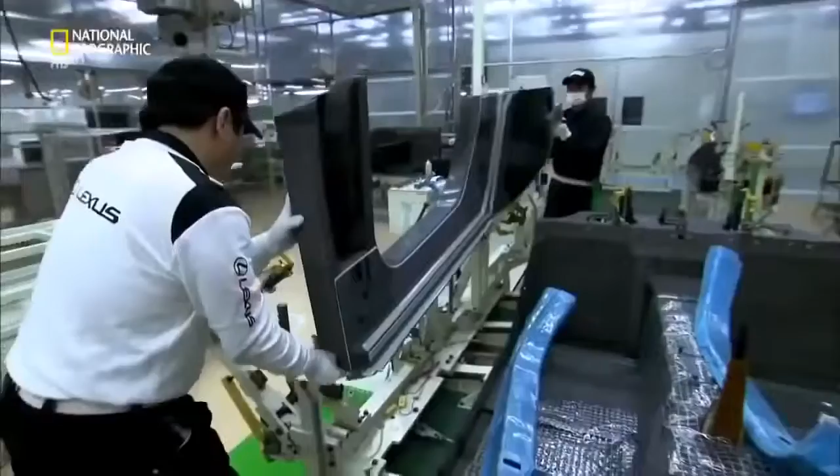Inside this top-secret megafactory, a car like no other is taking shape. Craftsmen hand-build what they consider an automotive work of art. Money is no object. This machine must redefine a billion-dollar brand. Failure is not an option.

Japanese marque Lexus sells itself on luxury, marketing its cars as elegant, quiet, high-tech, and efficient. Now, a different kind of car wears the Lexus badge, the LFA. Aggressive, loud, agile, with the highest-revving V10 engine in a production car, reaching 325 kilometers per hour. A car like nothing Lexus has ever produced before.

Lexus is just over 20 years old. The world's largest car maker, Toyota, created the brand to compete with other high-flying luxury marques: Mercedes-Benz, BMW, and Jaguar. It's worked — Lexus is now one of the biggest-selling high-end marques in the United States.

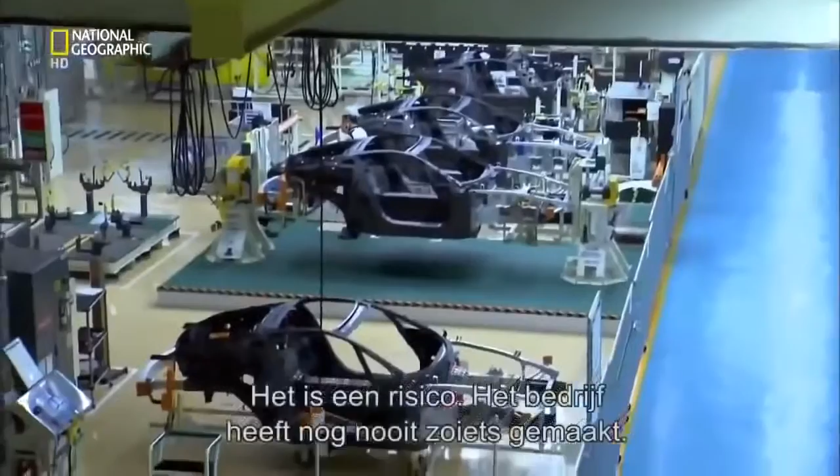It's a risk. The company haven't made anything like this before, and their reputation depends on its success. Chief Engineer Tanahashi is stepping into the unknown. He must build a car, a team, and a factory from scratch. Basically, we proceeded at my discretion, and where there weren't any rails, I laid them down.

Finding a factory in Japan isn't hard when you're part of the country's largest company. Toyota is so big they even have their own city, Toyota City. Of the company's 15 Japanese factories, 10 are found in the city or close by — among them, the Motomachi assembly plant.

The company transformed two unassuming blocks of this megafactory to create the LFA. They then scoured Toyota's 50,000-strong Japanese workforce to handpick just 175.

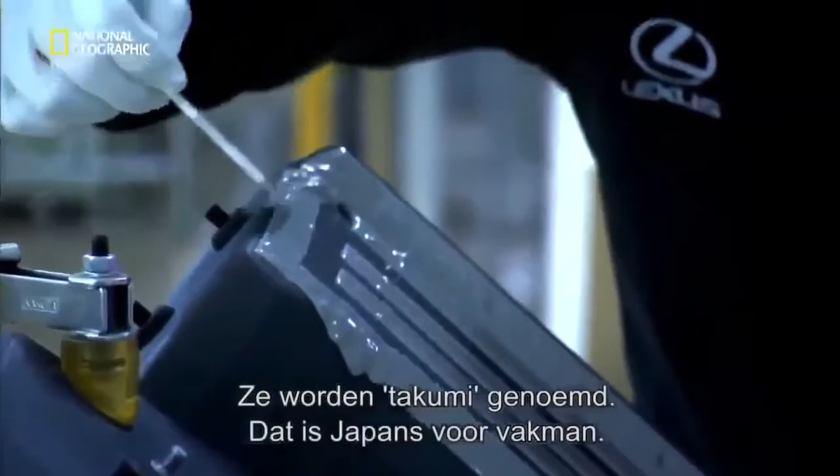All the associates here at the LFA Works feel they are artisans, not just operators. These artisans are known as takumi, Japanese for craftsmen — a status only conferred on the most highly trained, skilled workers. Each and every associate at the LFA Works is seeking to achieve perfection, taking this challenge on with a sort of samurai spirit.

Yamanaka Shigeru is manager of the LFA Works. His teamwork credentials come from another time-honored Japanese tradition: baseball. Before this, I was working as manager of the Toyota Motor Corporation baseball team, which brought people together from lots of different backgrounds. It was because I could manage that organization that I've been made manager here.

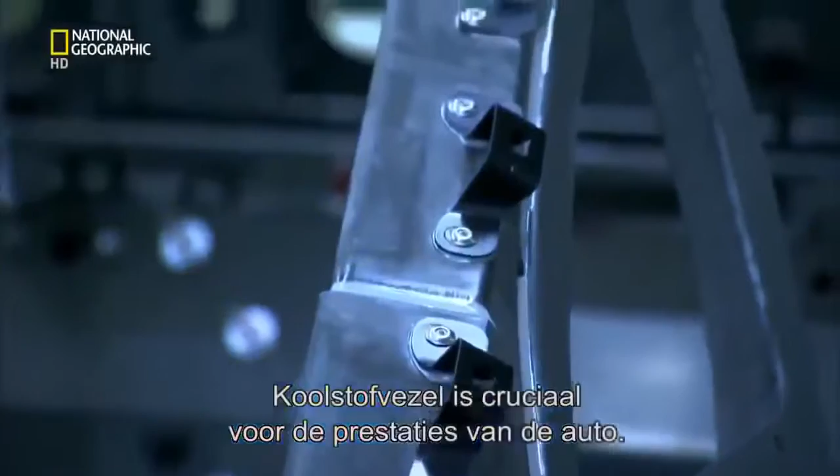To reach their goal, the tight-knit team utilizes sophisticated tools and materials to build the car. The most important of these is carbon fiber composite. Carbon is crucial to the car's performance — a material five times the strength of steel, yet a quarter the weight. It's the construction material of choice for both Formula One racing cars and the aerospace industry. The company even make their own carbon fiber here on site.

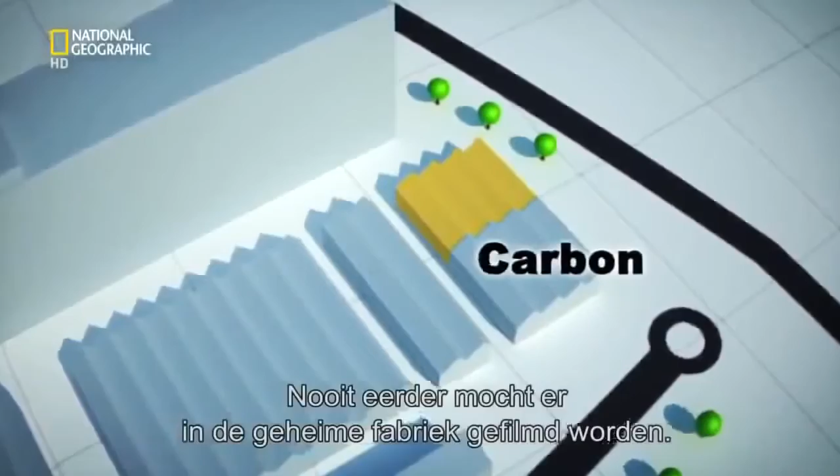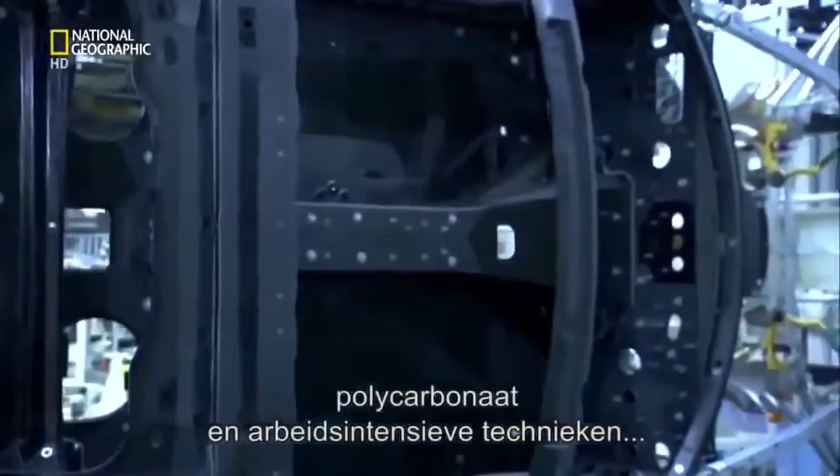Up until now, no television cameras have ever been allowed inside this top-secret facility. First, simple strands of carbon fiber are woven into a pliable cloth using an automated weaving machine. This fabric is then transformed through heat, pressure, polycarbonate resin, and labor-intensive techniques into the car's core, known as the tub.

The tub is pieced together like a 3D jigsaw. It starts with the construction of the floor. To make it, precisely cut carbon fiber cloth is lifted onto a mold. Next, skilled takumi smooth the supple fabric over the mold — this one is for the transmission tunnel that will house the drive shaft and exhaust.

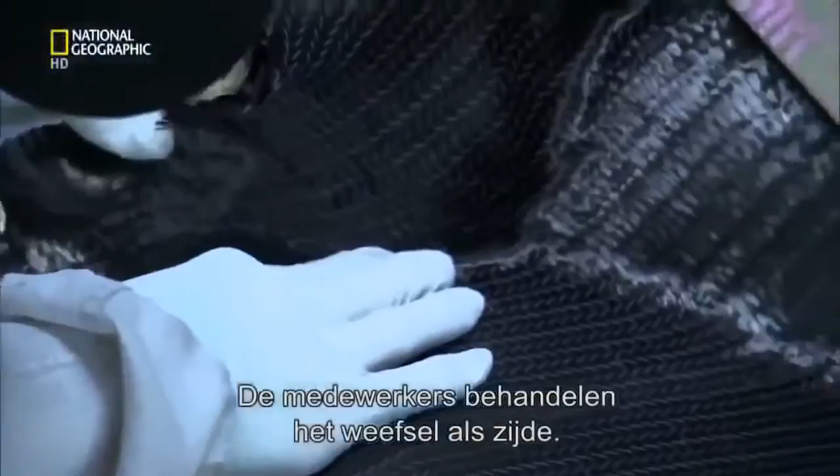In very complex areas like this, the fabric inevitably becomes frayed and not very neat. The associates work with these areas as if working with silk, taking great care every day. They also wear masks to avoid breathing in the hazardous fibers.

In the beginning, the associates found it very difficult to work this material. It was much easier when they used an iron.

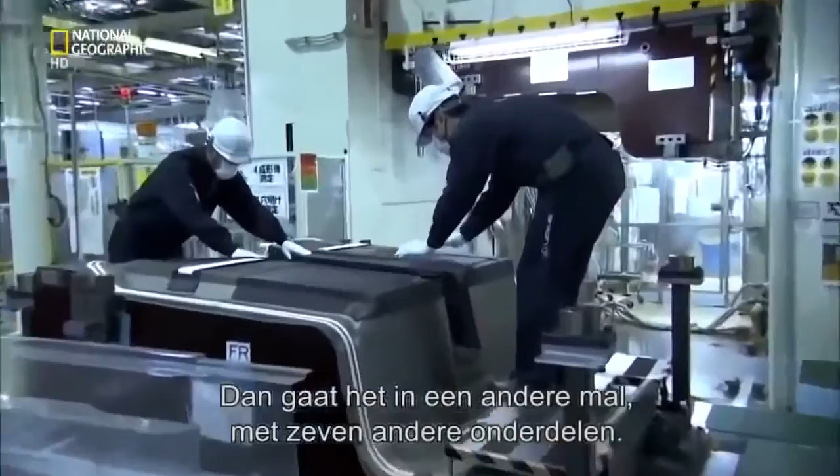The completed part is grill-heated to set its shape. It's then fitted into a template, along with seven other floor parts, and inserted into a 1,000-ton press. A glue-like resin is pumped into the template, and the whole section is then baked for 8 hours at 130 degrees Celsius. Under this pressure and heat, the resin sets hard, binding the individual parts together to produce the car's floor panel.

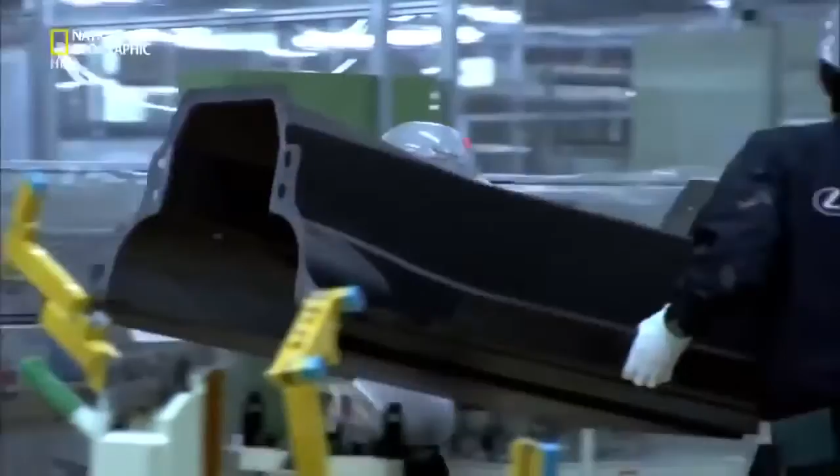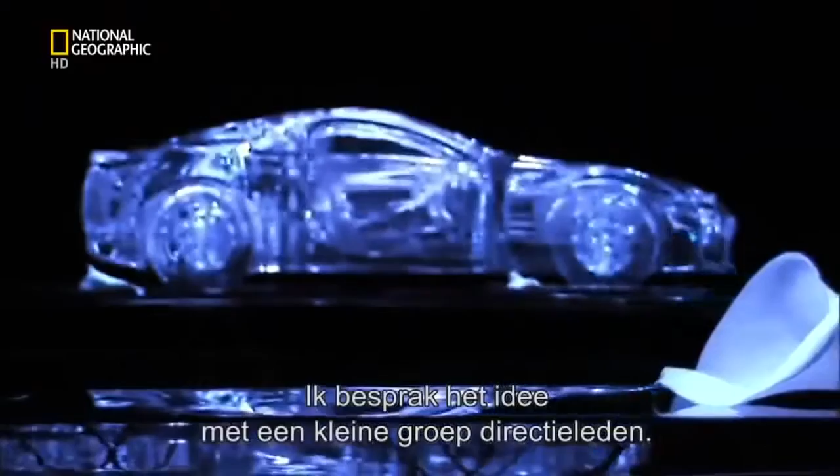Back in 2000, the concept of a world-beating supercar only existed in one man's head. At the company, I talked to just a small group of people at the top, not expecting anything, and they said, go ahead and try.

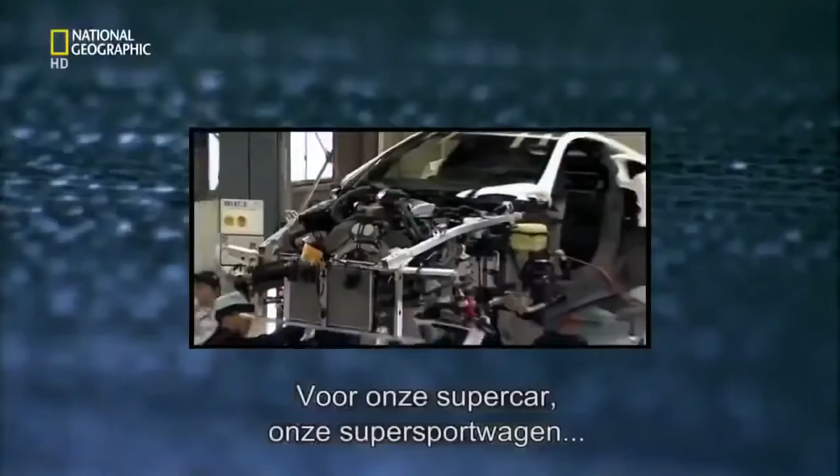With permission to proceed, Tanahashi gathers a team of engineers around him, and they start to make the basic engineering decisions. In the beginning, we planned to make the body from aluminium. But Tanahashi is fascinated with the possibilities offered by carbon. Developing a supercar, a super sports car, carbon fiber was a material I really wanted to try using, if at all possible.

But this wonder material has its drawbacks — it's expensive, and the company has never used it to build any of their cars before. Despite these significant challenges, Tanahashi gets his way.

In 2005, my boss said, why not go for carbon? Slapping me on the shoulder. And I made the decision to go for carbon then.

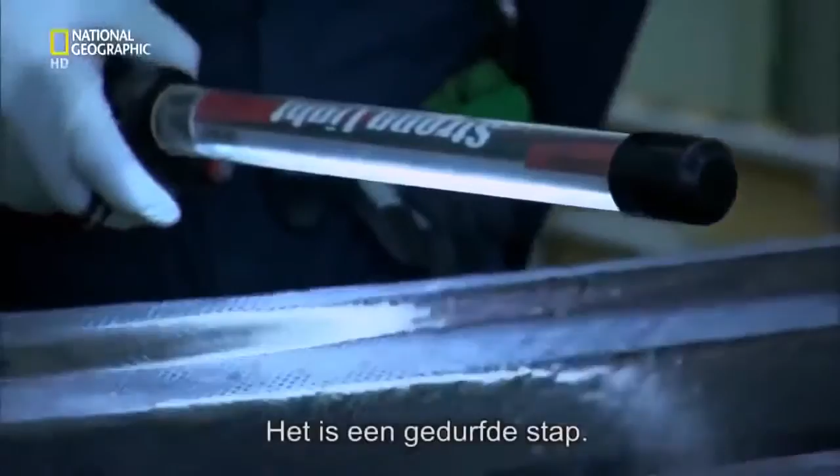It's a bold step. Everyone involved with this project must master a material they have no experience with at all. It was the first time the workers had touched carbon, and everything about it was difficult for them.

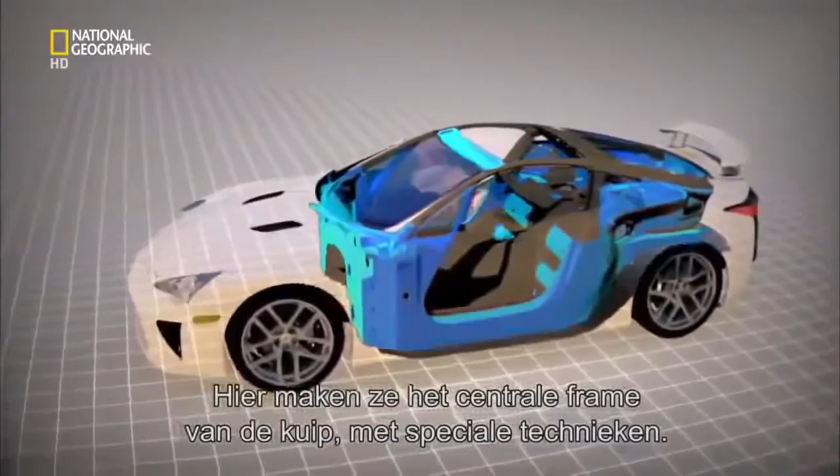In the state-of-the-art carbon fiber facility, the Takumi are returning from lunch. They vacuum themselves down to remove any foreign particles before entering a highly confidential sealed room. Here, the majority of the tub's central frame is created using the most intricate techniques.

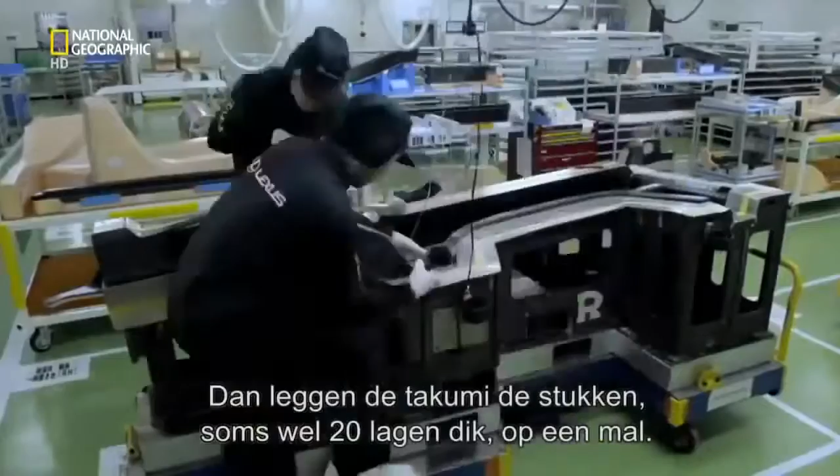An automated laser cuts out hundreds of individual shapes from carbon fiber cloth pre-impregnated with a sticky resin. Next, Takumi layer the cutouts, up to 20 sheets deep, onto a mold. This one will make the right side panel. The associate uses a dryer to raise the temperature of the laminate, half-melting the resin as he applies it. The tacky cutouts stick to each other, and any gaps are squeezed out using a vacuum bag that forces them together.

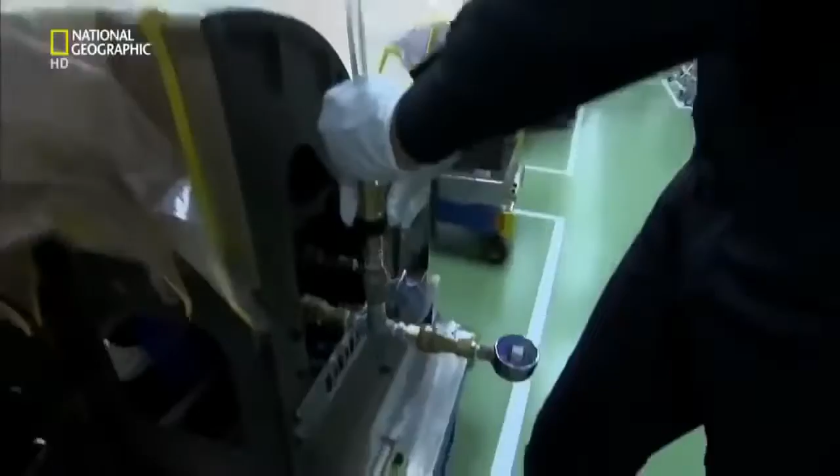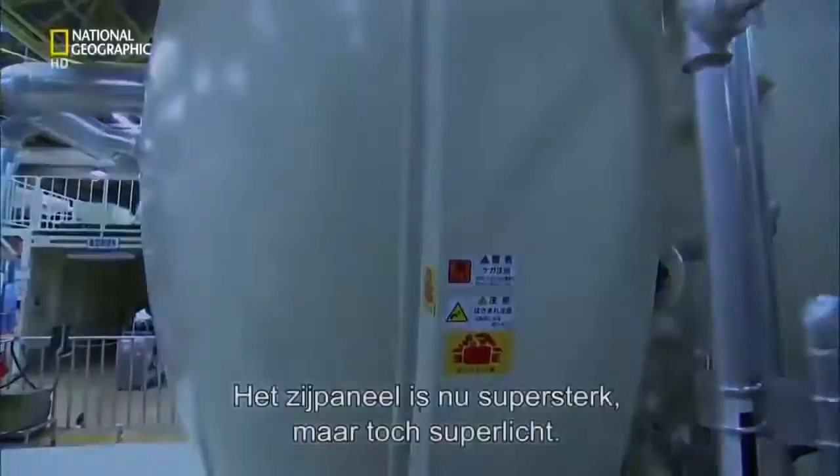The shrink-wrapped side panel is then wheeled across the works and loaded into a pressurized oven. Baking overnight at 150 degrees Celsius sets the resin, resulting in a side panel that's both ultra-strong and ultra-light. An aluminium equivalent would be twice as heavy.

Weight saving is the holy grail for all auto engineers. Less weight and more power leads to increased acceleration, and speed defines a supercar. The body of the LFA is 65% carbon fiber, helping it accelerate from 0 to 100 kilometers per hour in 3.7 seconds. If made of aluminium, it would be 100 kilograms heavier, like having a sumo wrestler in the passenger seat. As it is, this car weighs just 1,400 kilograms all in.

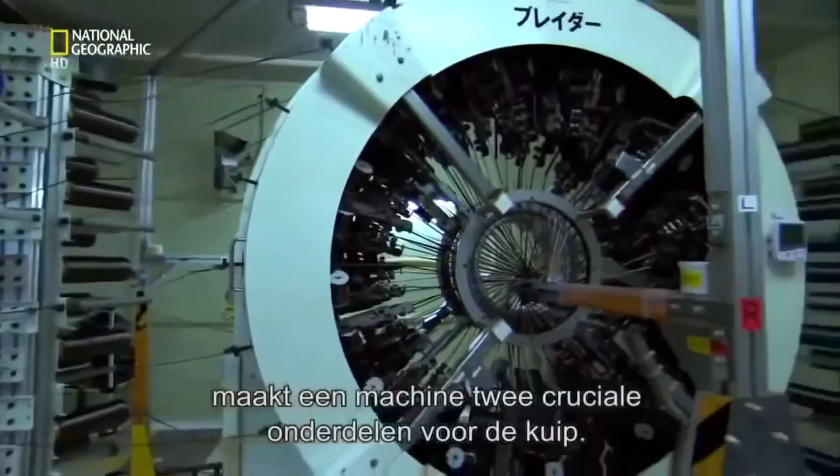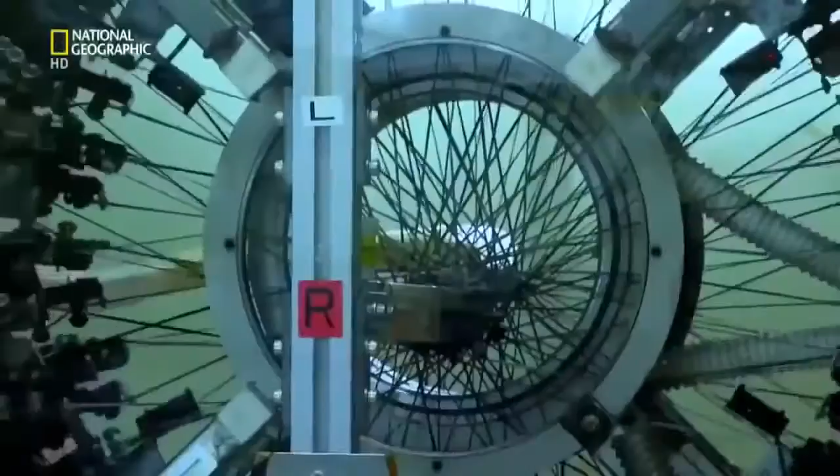Back at the factory, in a locked room, a bespoke machine creates two crucial parts to complete the tub's construction. The roof rails support the windscreen, as well as protecting the driver if the car rolls over. This custom-built circular loom weaves the carbon rail in 3D. It uses lasers to control the feed of carbon fiber strands onto 144 bobbins. These knit the carbon around a top-secret automated template fed through the center of the loom. This is done twice over to cross-thatch the carbon weave, giving the rail its strength.

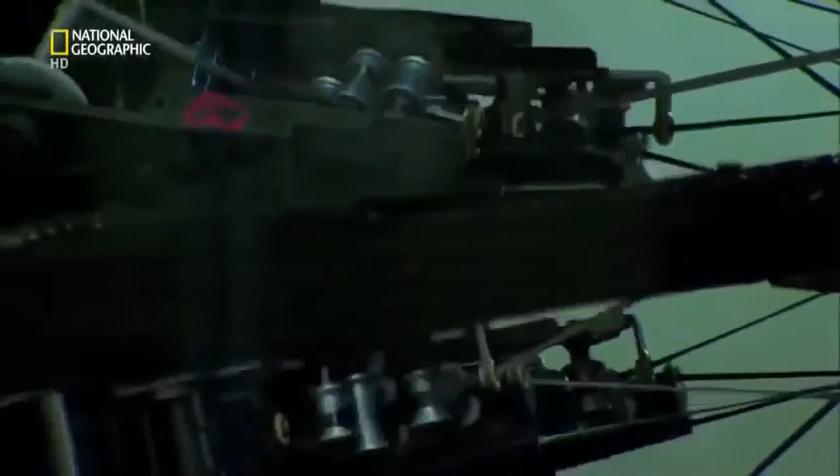The whole mechanism has its own control box, and for good reason. If something goes wrong, even a little thing, the shape gets distorted immediately, so the operator constantly pays attention to avoid this.

The roof rail is heated and impregnated with more resin to complete its metamorphosis from a flexible tube to a rock-hard rail. You may think this is quite heavy, but it is only 2 kilograms.

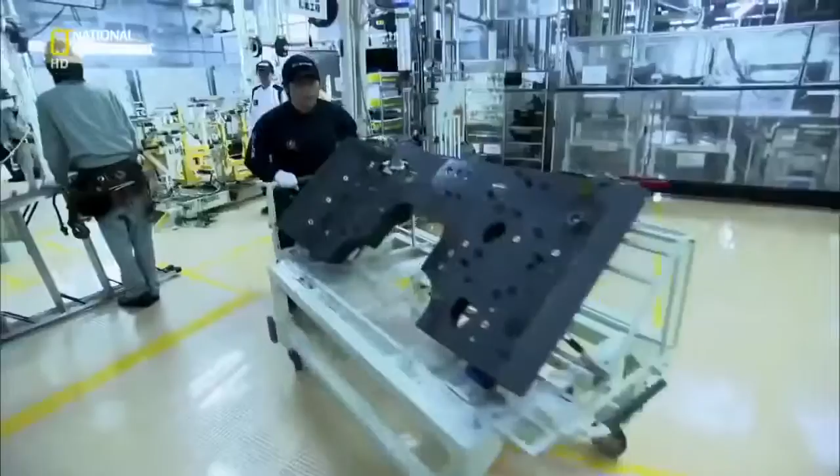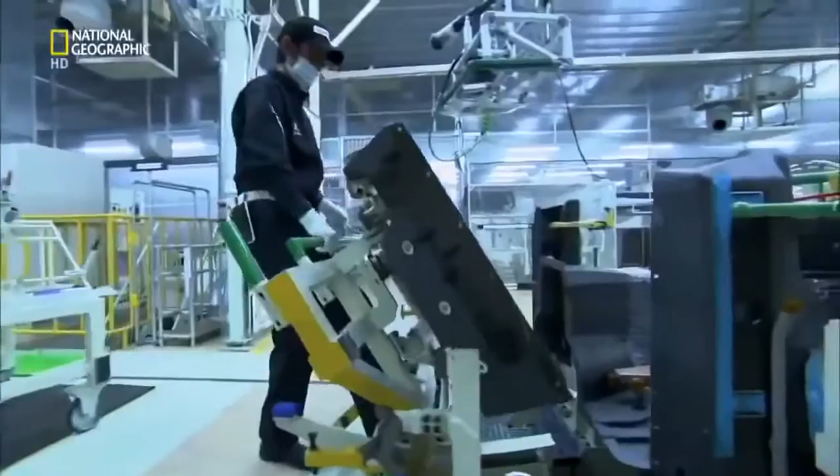The tub is bonded in another top-secret jig. First, a super-strong adhesive known as epoxy resin is applied by robot and hand to each of the parts. The separate parts are transferred to the jig and locked in place. Pop rivets keep the pieces aligned.

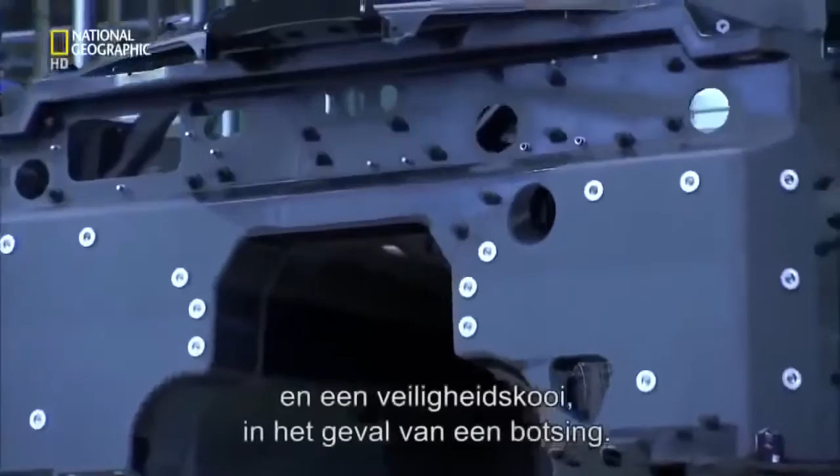To cure the epoxy, the jig is pushed into an oven and baked for 60 minutes at 60 degrees Celsius. The resulting tub is so strong it acts as both the structural core of the car and as a crush-resistant safety cell, should the car crash.

The challenge now is for Matsumoto Kengo, chief designer of the LFA, to create a car with a body as technical as it is elegant. For us, aerodynamics, heat and airflow management should be tangible in the design.

A conventional car cools its engine with forward-mounted radiators that suck cold air through a front grille. Not the LFA. Front space is at a premium, so coolant is pumped from the hot engine to twin radiators mounted behind the car's rear wheels.

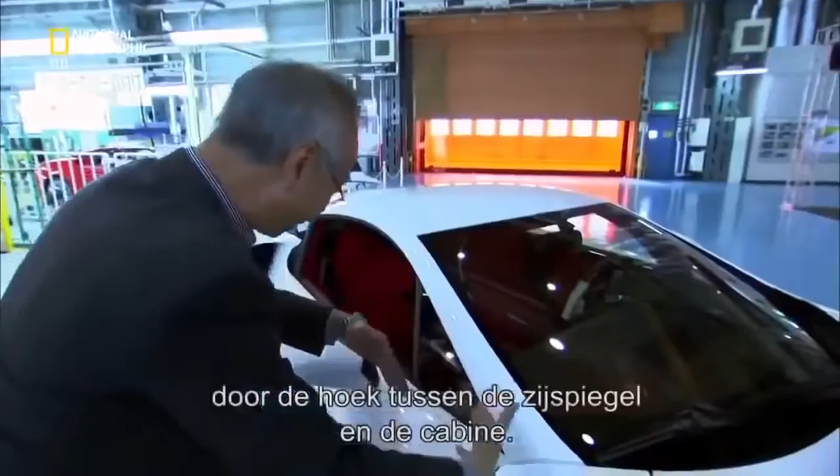Matsumoto had to shape the car to funnel cold air to these vital components. Airflow management is optimally controlled by setting the angle between the door mirror and the cabin. It goes past the cabin and smoothly into the air intake for the rear radiator. This shape is not just for styling. The intake is deliberately formed here, from the base of the glass.

The result is an airflow system capable of cooling the engine even under the most extreme race conditions.

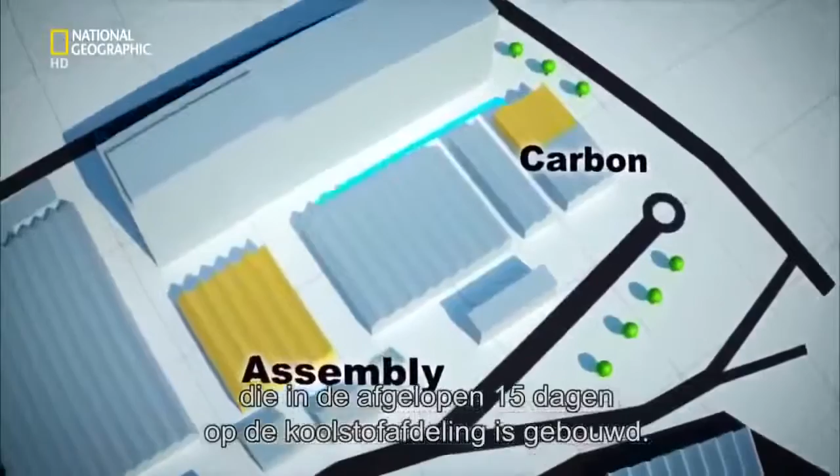It's 8:45 in the morning at the LFA works. The Takumi are warming up for an 8-hour shift ahead. Their first task is to greet the bare cabin as it arrives from its 15-day build in carbon round the corner. In assembly, the cabin will progress through four positions: trim, chassis, final, and alignment.

$15,000 worth of parts go into making an LFA. The first of these are attached here in trim.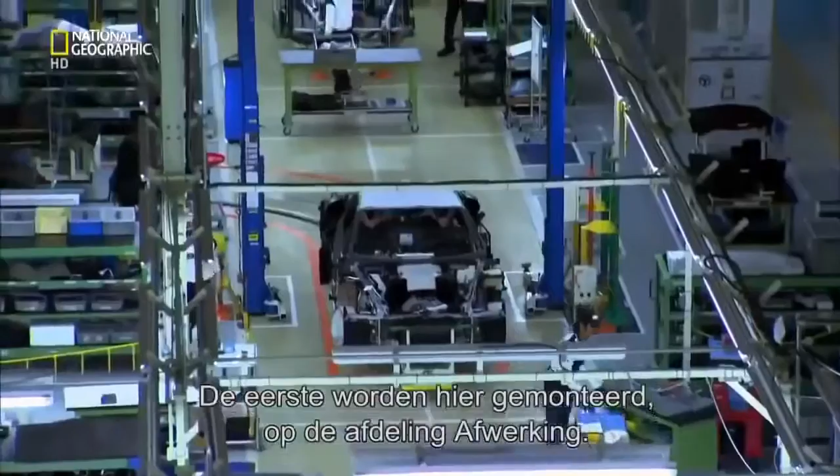Just meters away, other Takumi assemble the drivetrain and suspension. The drivetrain comprises the transmission, torque tube, and, last but not least, a 4.8-litre V10.

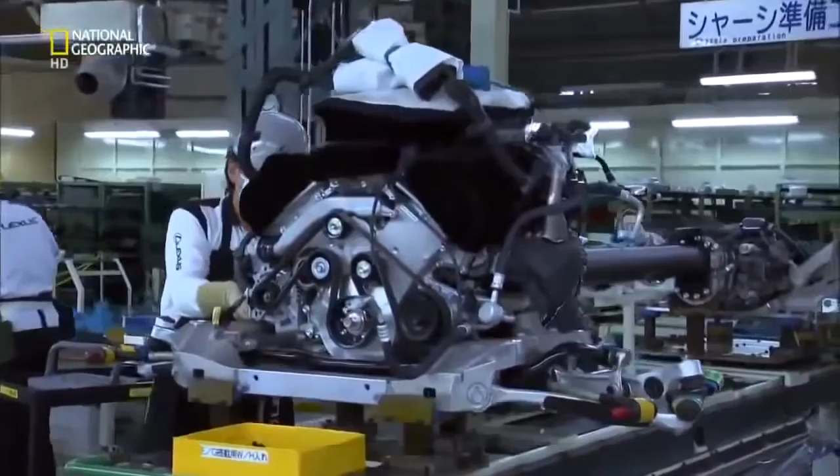The location of this engine is crucial to the car's entire concept. I wanted to build the car around the people in it. For a supercar that puts people first, the optimum place for the engine is front mid. This location puts the engine between the driver and the car's front wheels. With the transmission placed at the rear, the driver is in the center and the car feels balanced to drive.

The aim is to make the car's handling as good as possible. But a front mid configuration dramatically restricts the space available for the engine.

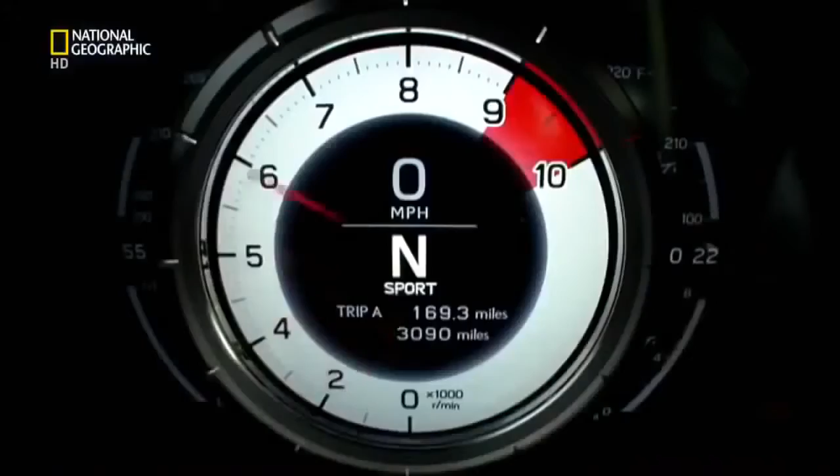Tanahashi has a problem. You need an engine of a certain size with a certain degree of compactness, but you want a high-powered engine as well. Tanahashi needs a small engine to fit in the restricted engine space, but he also needs the power of a large engine, because power equals speed.

And that isn't all. The high-pitched sound of Formula One makes you shiver, doesn't it? I really wanted to have that as part of the LFA. Only a high-revving V10 engine supplies this combination of power and sound, but a traditional V10 is too big for this mid-front configuration. Lexus have made nothing like this before. Their production line cars use 6- and 8-cylinder engines engineered for a super quiet ride. This V10 will be the opposite.

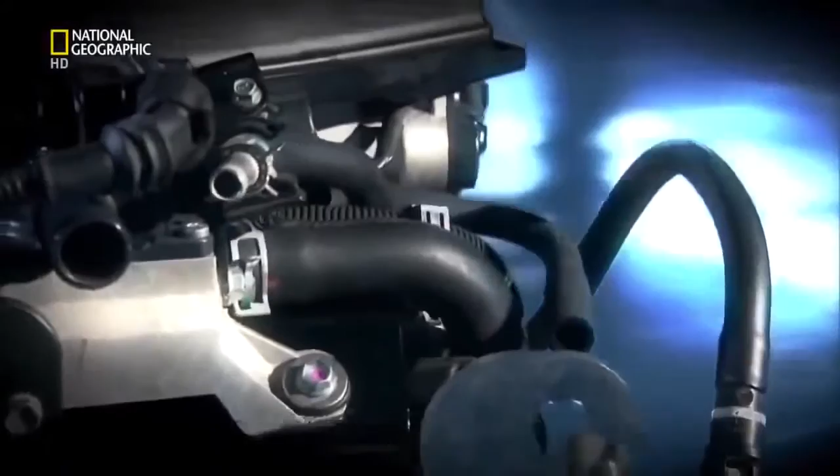Tanahashi turns to some old friends for help. We are a motorcycle manufacturer. We understand power alone is not enough in a vehicle. For a sports car, small and lightweight is critical.

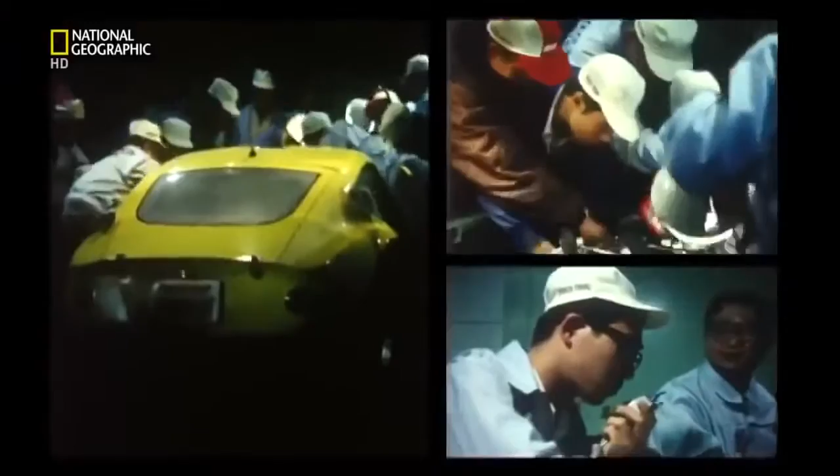For almost half a century, Yamaha have worked with Toyota to create high-powered lightweight engines and cars. The legendary 2000 GT, star of the James Bond film You Only Live Twice, and Japan's first true sports car, was the first fruit of their collaboration.

Headed by Lexus engine guru Okamoto Takamitsu, the team sets itself an ambitious goal: to create a naturally aspirated V10 engine as compact as a traditional Lexus V8, with the weight of a V6. I wanted to create something different to any other supercar engine.

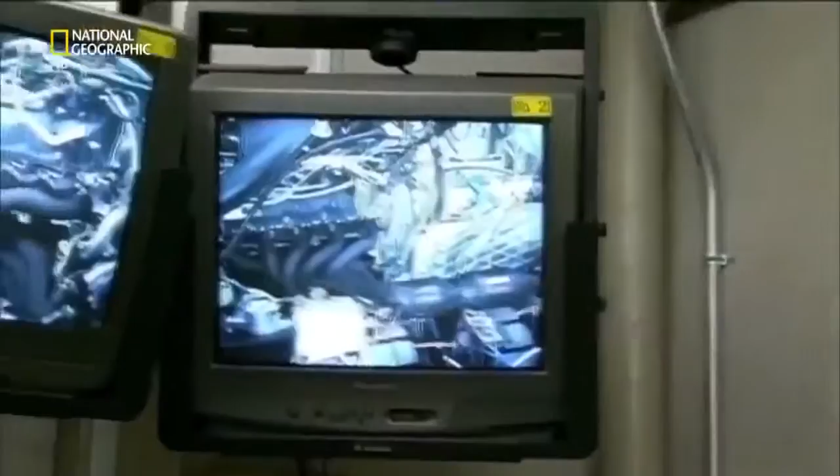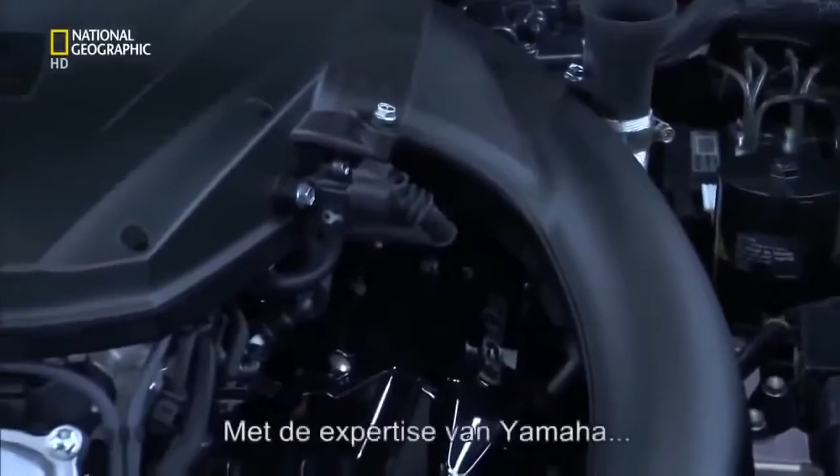Normally, engineers use turbochargers to boost the output of smaller engines to simulate V10 power. But turbocharged engines don't have the rapid response, acceleration or sound of a naturally aspirated V10. By using Yamaha's motorcycle know-how, the lightest metals, and redesigning the engine's guts, Okamoto creates a masterpiece of engineering: a non-turbocharged compact V10 that fits into a mid-front design while keeping weight to a minimum.

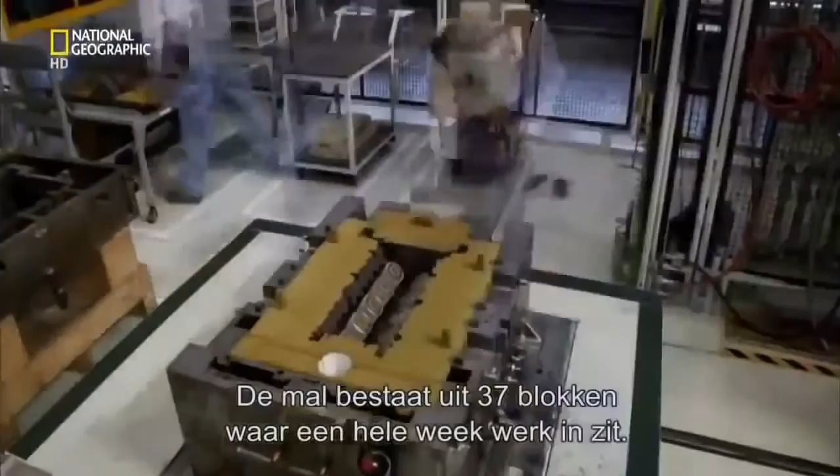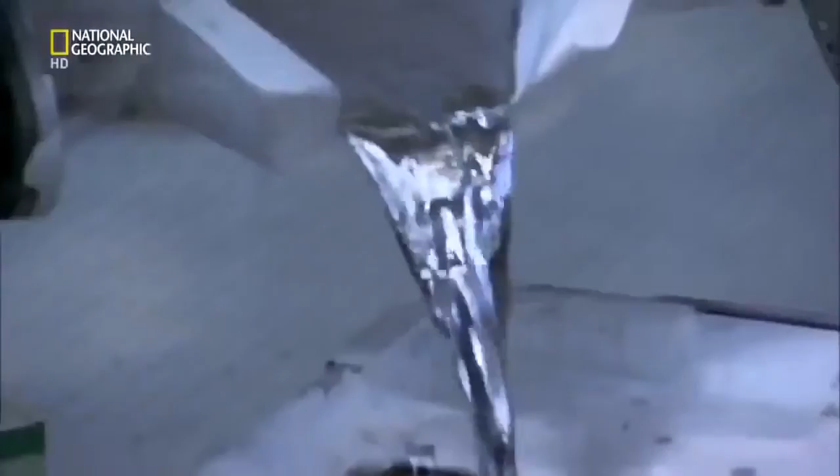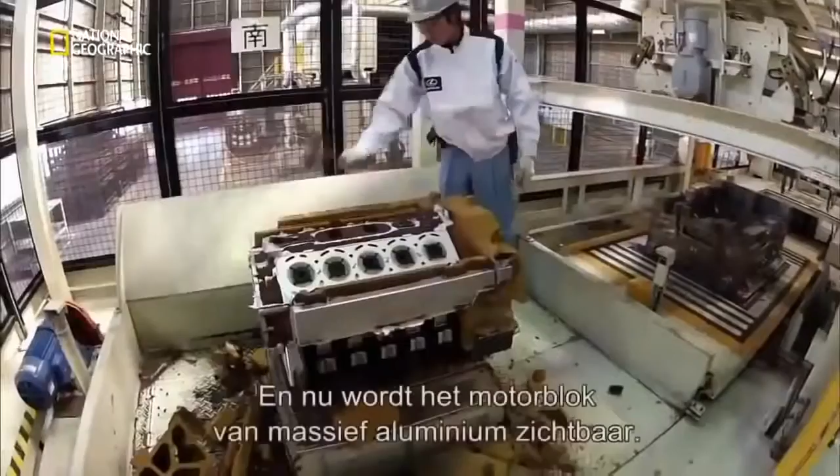The engine starts life in Toyota's Miyoshi plant as molten aluminium. It's cast in a 3D resin-impregnated sand mold made from 37 individual blocks that take a week to fashion. With the blocks fitted together, the mold is ready to be filled. At 750 degrees Celsius, impurities are scooped off the top of the molten aluminium. The liquid metal flows into the mold as a vacuum sucks out any contaminating gases. Two hours later, with the metal set, the sand is hammered off to reveal the solid aluminium engine block inside.

It's off to Toyota City's Honsha factory and the company's highly confidential Formula One engine facility. These works are always off limits. We're going to go in. Are you ready? Come in.

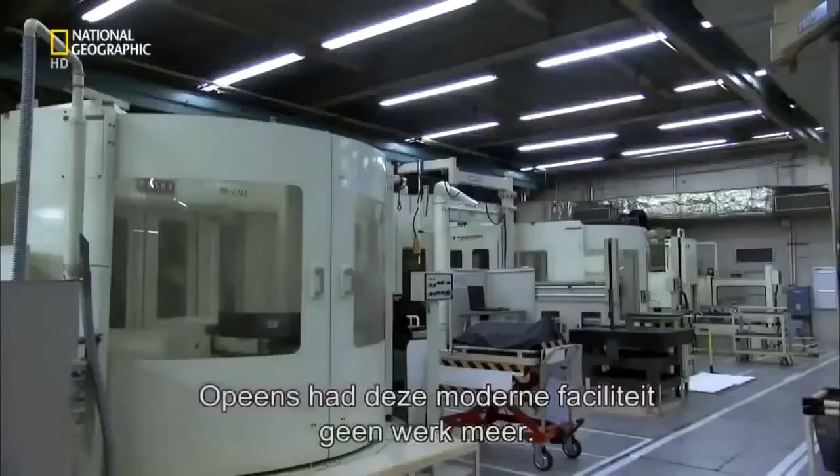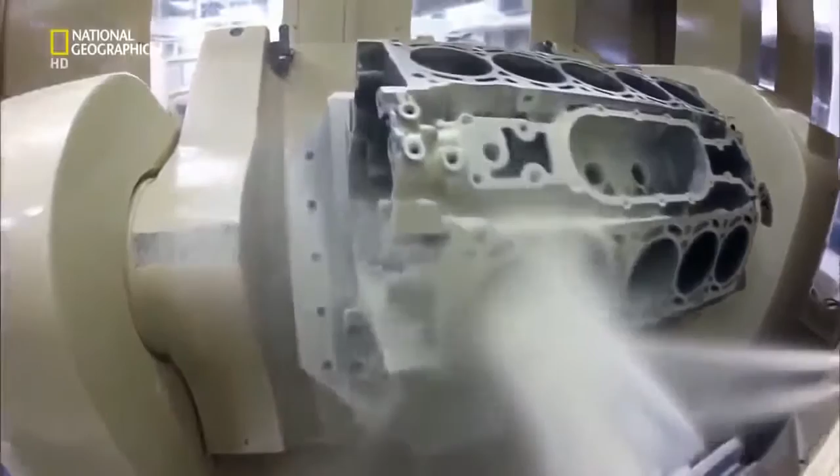Television cameras have never been allowed in here before. For a decade, Toyota spent big competing in Formula One racing. But without a win in 139 races, they withdrew in 2009, leaving this state-of-the-art facility idle. For the LFA team, it was too good an opportunity to miss. The close parallels with F1 engine technology make this milling facility a ready-made fit. In these million-dollar automated machining tools, the rough engine casts are milled, drilled and polished before emerging as precisely spec'd engine blocks.

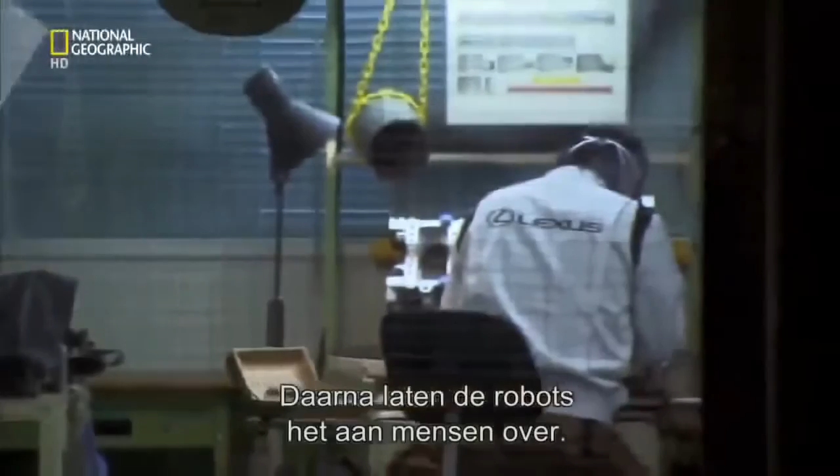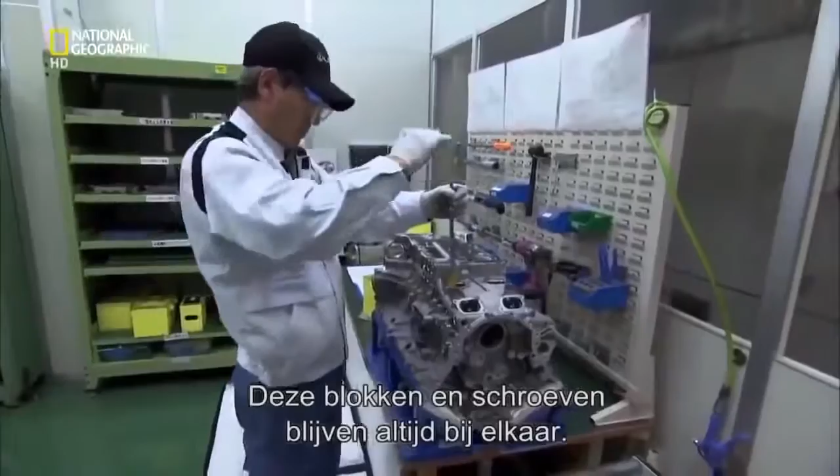Then the robots hand over to humans. In a sealed room, Takumi hone every sharp edge using precision polishing tools. Finally, a highly skilled Takumi pre-assembles the finished engine blocks to check they fit precisely. These blocks and screws are paired for life. Disassembled, they travel as a unit to Yamaha's Iwata city plant, 90 kilometers southeast of Toyota City.

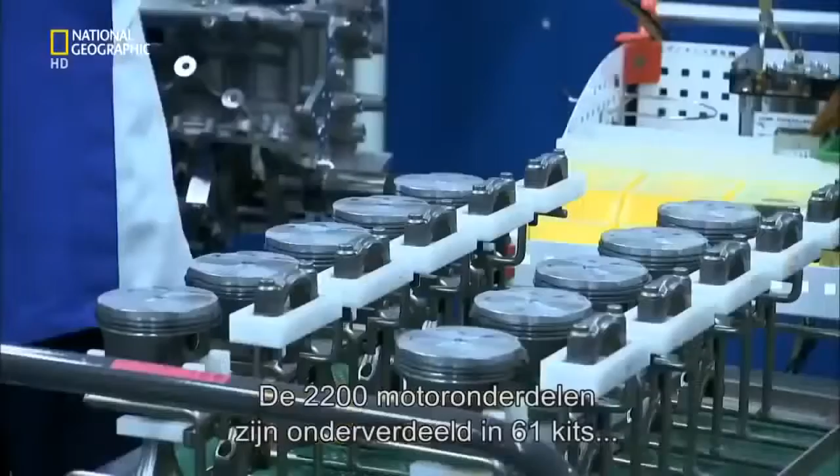The engine room here takes obsession to new heights. As you'd expect, hairnets and airlocks prevent any particle contamination. But the room is also kept at a constant temperature and humidity to ensure that every engine part is at the same state of thermal expansion during assembly. This is more laboratory than workshop. The 2,200 engine parts are divided into 61 different kits for assembly by number.

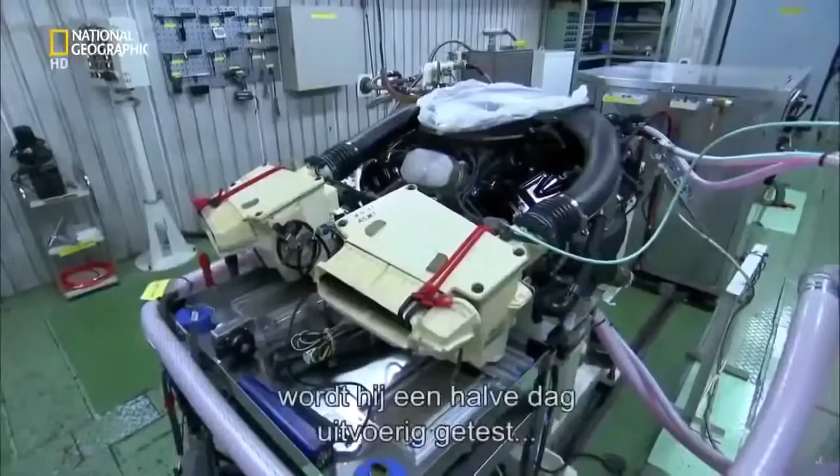Each hand-assembled engine bears the Takumi signature. Before this masterpiece goes anywhere near a car, it undergoes a half-day of exhaustive testing in the room next door to engine assembly. The resulting 4.8-litre engine is so responsive that it takes just half a second to reach 9,000 RPM. That means instant acceleration, whatever gear you're in. This engine has excellent response and more RPM than any other commercially available engine. Response time is so fast that a digital rev counter is the only unit able to keep up.

And the sound of this high-revving engine is unmistakable.

The sound of the LFA is unique, and once heard, never forgotten. To achieve the engine soundtrack that Tanahashi insists upon requires more of Yamaha's specialist knowledge.

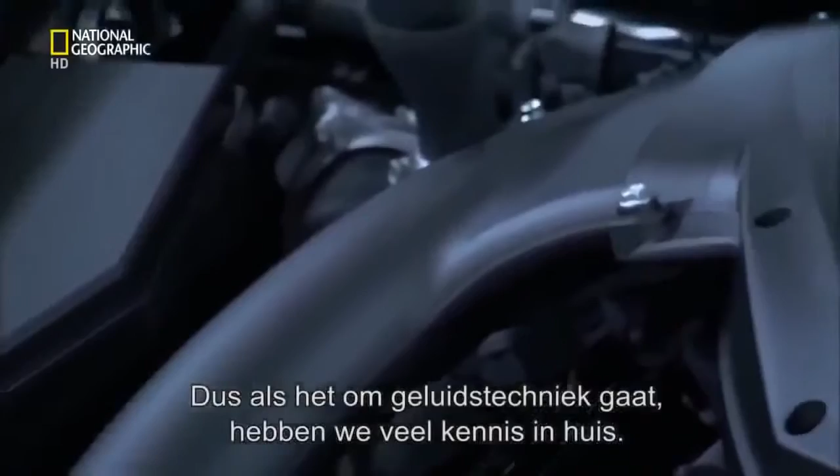We are a manufacturer of musical instruments, so when it comes to sound technology, we have a certain level of know-how. Honji Yoshikazu is obsessed with sound.

I think the relationship between a super sports car and its driver is like the relationship between a top musical performer and their instrument. When they play in a certain way, they can listen to that sound and use it to produce another, better sound.

Critically, a car has two different sound characteristics. One sound is the exhaust. You can call it an iconic sound - just by hearing that sound, you know which car it is. The other, which we were particularly concerned with, is the sound heard by the driver.

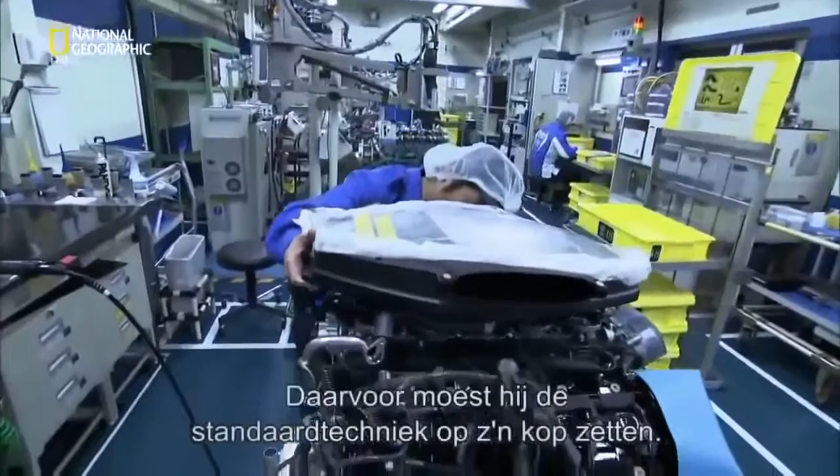To refine the driver's soundtrack, Heiji Maruyama, general manager of Yamaha Motors, had to redesign the component that sits on top of the engine, called the surge tank, by turning convention on its head. The function of the surge tank is to send air equally into all 10 cylinders.

Normally, techniques to reduce noise from the intakes are used. We thought to go the other way and use it to amplify the sound, to communicate it to the driver.

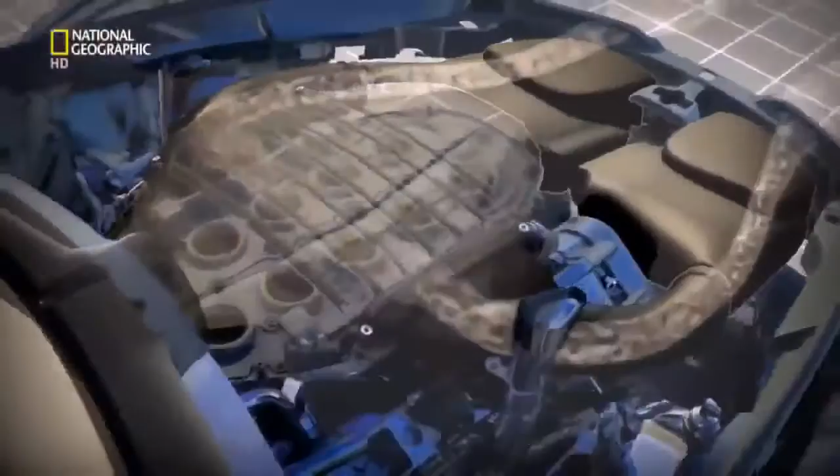Maruyama tunes the chamber by varying the thickness of the surge tank's upper surface and adding internal vibrating ribs. The construction is very like that of an acoustic guitar or violin.

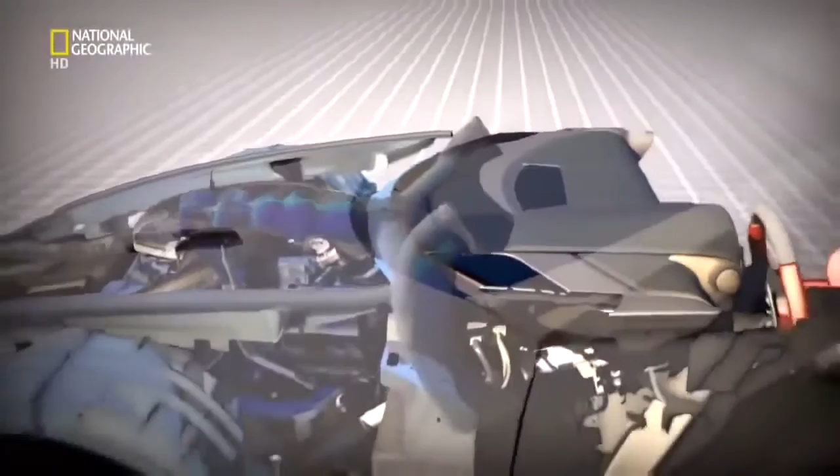The team channel these good vibrations back into the cabin using sound passages. We use these to send low-pitch sound to the driver's feet and higher frequency sounds through at ear level. The driver is in the middle of this dynamic surround sound system.

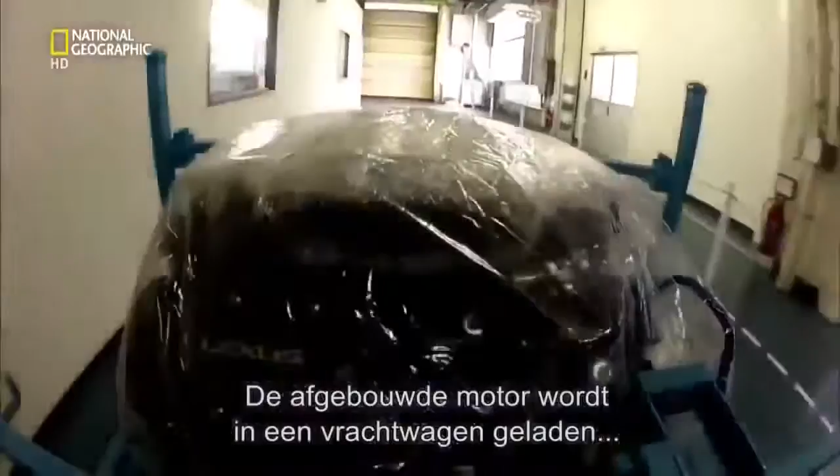The completed engine is forklifted onto a waiting truck for shipment back to the LFA works. Here, as part of the assembled drivetrain, it's inserted into the cabin's belly, guided only by eye.

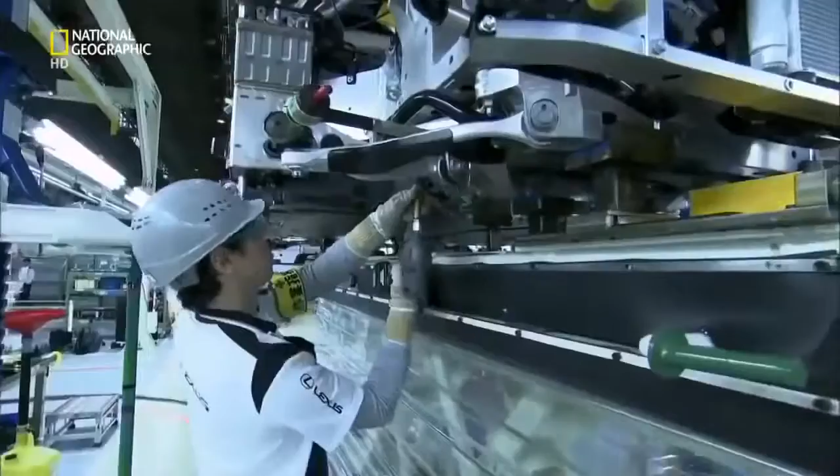With the guts of the car in place, it's time to feed them. An automated pump injects engine oil, brake fluid and coolant into the appropriate under-bonnet opening.

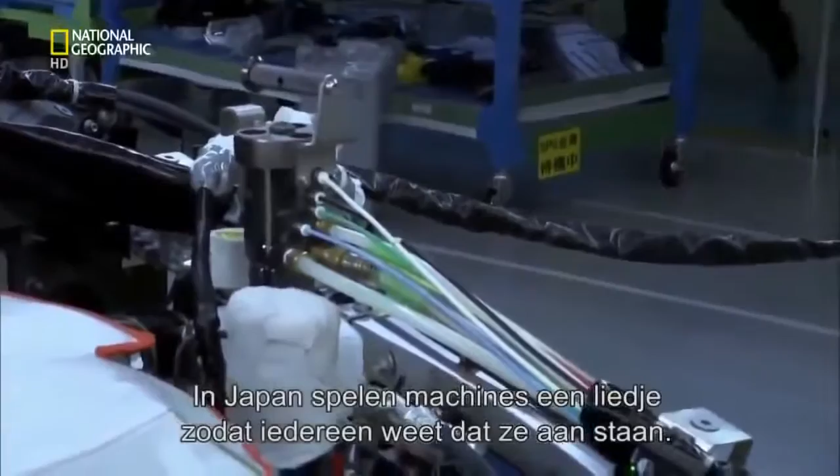In Japan, machines play a tune to alert anybody nearby that they're running. This one plays an American folk song. With the precise volume of fluid added, the pump stops, as does the music.

The car's 9 moulded glass fibre body panels are manufactured off-site. This material is both strong and light, but far cheaper to replace than carbon fibre, should the car crash.

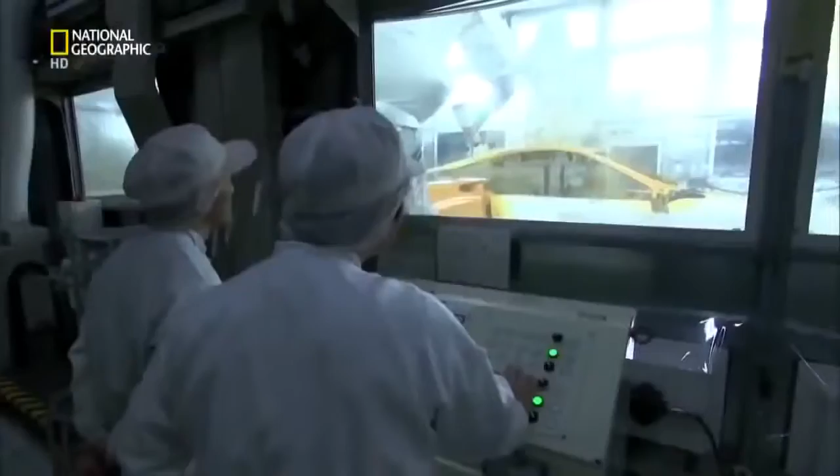The paint shop is under the same roof as assembly, but it's a very different world in here. At the LFA works, paint is one of the few production processes performed by robot. The company believes they give a more consistent finish.

But there's always an ongoing human battle in the paint department. Dust is the greatest enemy for painting. If dust gets into the paint surface, when it's heated, the dust swells up and causes a blister.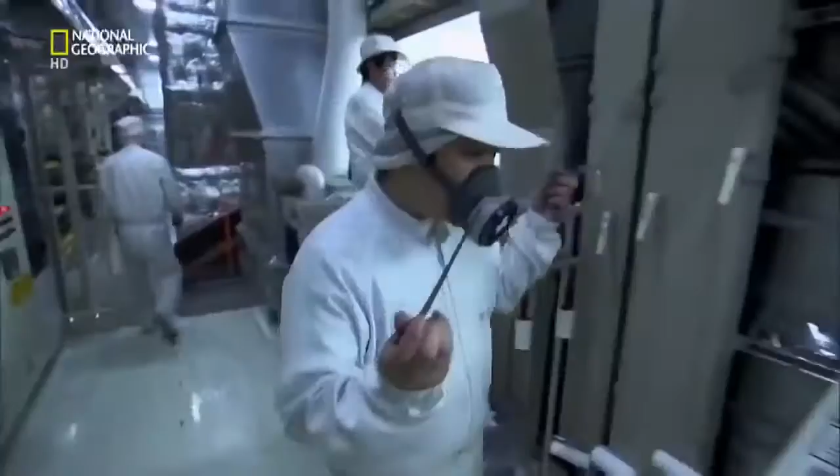So the atmosphere is controlled on a daily basis, and there's a strict dress code. Up to 5 layers of paint are applied. And where robots can't reach, humans can.

Job done. The sprayed panels are dried in an oven at 100 degrees Celsius for 50 minutes before being wheeled out for inspection.

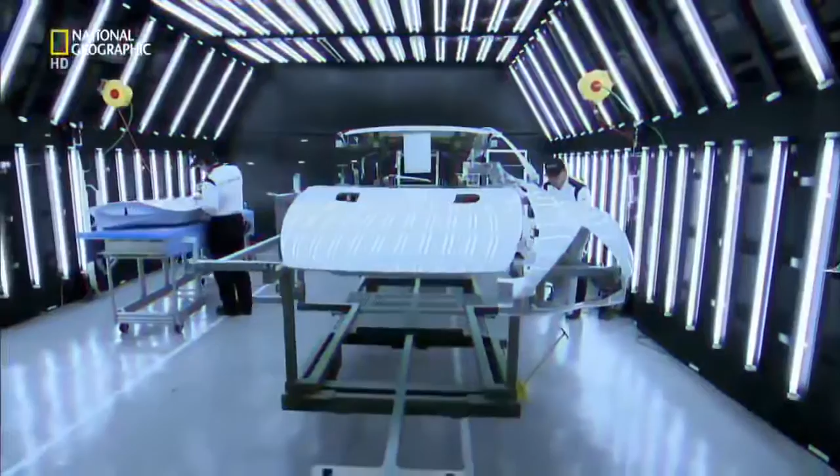The battle against dust continues, with water nozzles spraying a fine mist into the air to stop anything drifting onto the pristine surfaces. A bright light inspector spots any blemishes and marks them up to be polished out.

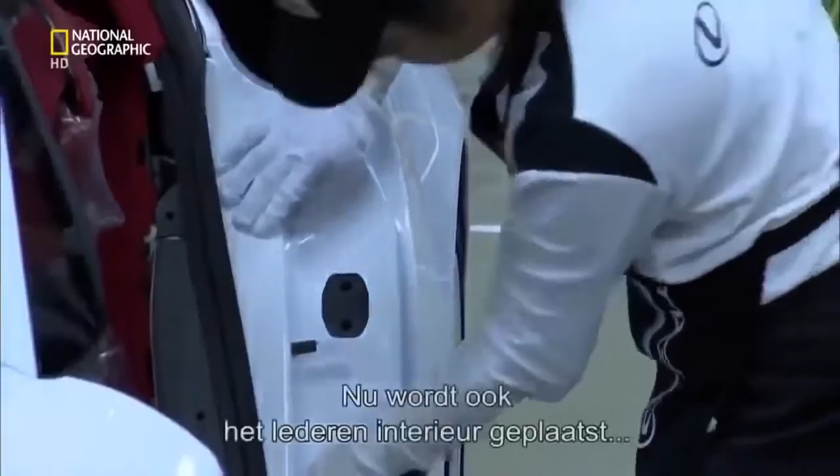The completed panels are wheeled out of paint across the factory floor and attached to the carbon tub back in assembly at the 3rd position on the line, known as final. Here, the hand-stitched leather interior is installed, and the forged aluminium wheels with bespoke Bridgestone tyres are also fitted.

It looks as if the associates are performing each task very slowly, but every one of them is working very carefully and with a high degree of certainty. If you compare it to a sport, they are top players who complete a successful play every time.

The LFA works runs like clockwork, yet there's no clock watching. The reason why there is so much time is that Chief Yamanaka tells us to take our time and work slowly so that we can make something that we know is good.

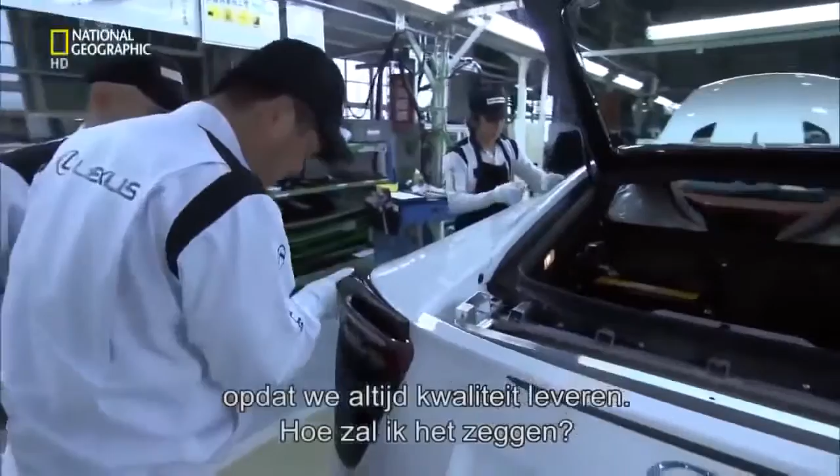How can I put it? He says that in order to ensure quality, we can take as much time as we need. That goes for overtime as well. If it means we make something good, then we can do overtime.

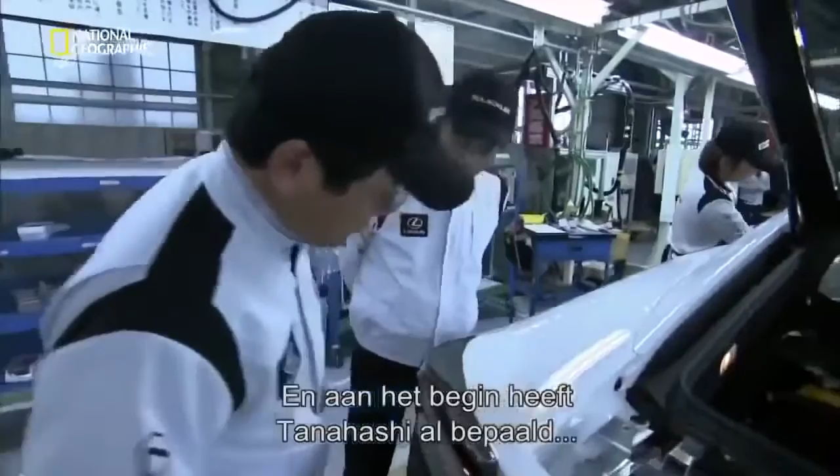The only stipulation is that one car must drive off this assembly line every day. And from the beginning, Chief Engineer Tanahashi was clear that only 500 would be built.

At a car a day, that will take just 2 years. And then, this factory will close. Making only 500 cars positions the LFA as a very special car. There is no plan to make any more at all.

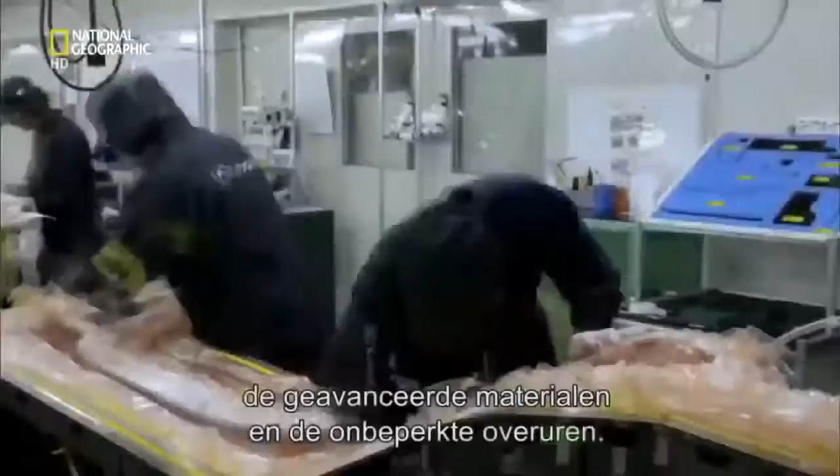Even pricing the LFA at $375,000, the most expensive Japanese road car ever, a limited production run isn't going to recoup the costs of development, the use of cutting-edge materials, and unlimited overtime.

I think it will be difficult to make a profit with only 500 units delivered. But by producing the LFA, the Lexus brand gains in value and is well received worldwide.

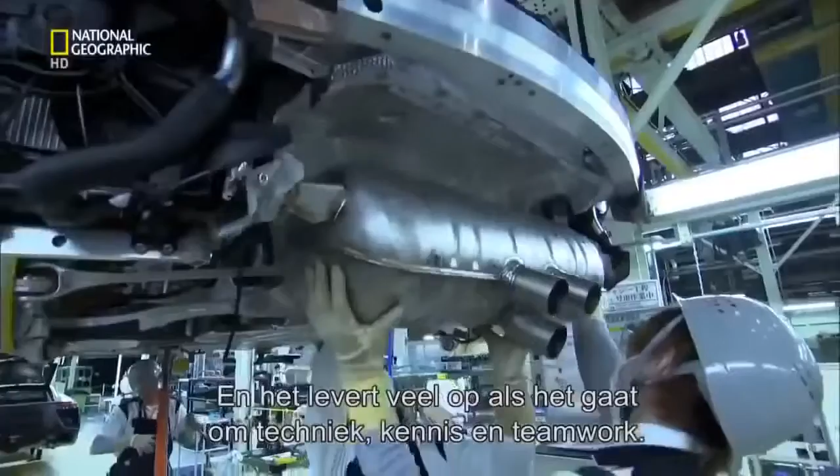I think the legacy will be left in technique, knowledge and teamwork for making cars that will please our customers in the future.

Back in 2004, with the prototype build, Chief Engineer Tanahashi takes a bold decision. He wants the car proved on the severest of tracks. Nothing in Japan fits the bill, so he takes the entire development team to the notorious Nürburgring in Germany. For us car makers, the Nordschleife on the Nürburgring is like a mecca for cars. This is where this car was honed.

The 20-kilometer Nordschleife section of the Nürburgring is infamous as the world's most punishing test track. For four years, the team tests every aspect of the car's engineering around its dips, jumps, relentless corners, and flat-out straights.

The car's development makes progress towards its production deadline, but Tanahashi wants to fast-track its fine-tuning. In 2008, he throws it into the unforgiving world of racing and enters the Nürburgring 24-hour race. It was purely to get more feedback on the production type LFA and to improve it under real race conditions. The brutal experiment works. A year later, the revised car wins its class.

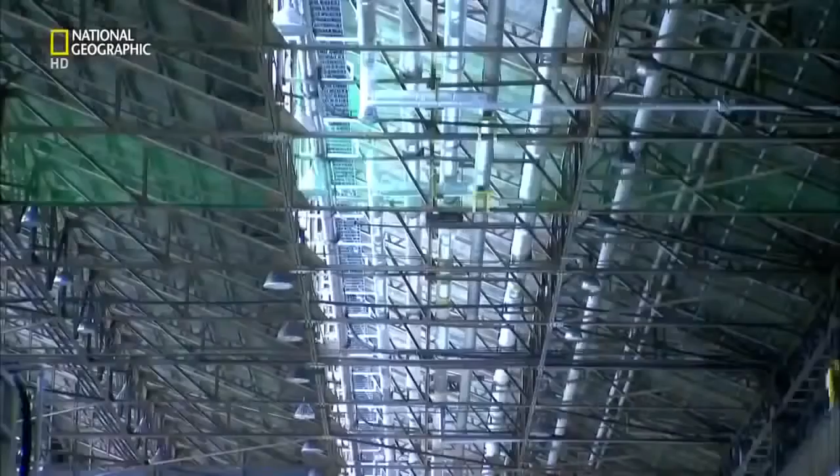Tanahashi is finally happy, and in 2010, the LFA goes into full production. And when in 2011, a special race edition of the standard LFA is launched, its name pays homage to the racetrack that forged it. It is with thanks to that sacred place that we called it the Nürburgring package.

This Nürburgring package has a retuned engine which pumps out 571 horsepower, 11 more than the standard engine. This extra power requires more downforce to keep the car on the track, so the rear spoiler is larger and fixed. Left and right canard fins on the car's front bumper also increase downforce.

The stiffer lower suspension makes it more suitable for a life on the track. Finally, to increase acceleration, the computerized transmission is upgraded to change a split-second faster. It all adds up to a Japanese supercar. Only 50 will be built, each with a price tag $70,000 more than a standard LFA.

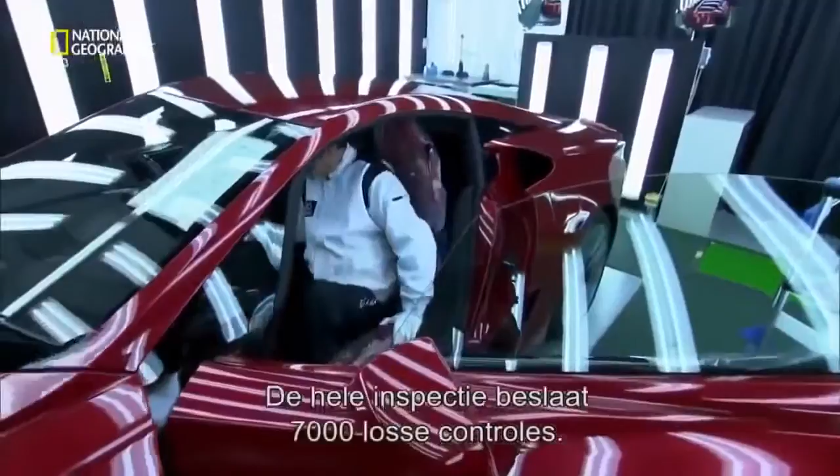Back at the LFA works, in assembly's last position, the wheels are aligned to ensure the car handles perfectly. After three days in assembly, the car officially moves to inspection. The inspection process involves 7,000 separate checks. Hayashi Katsumi does the first of 1,482 of these under lights.

Right now, I'm inspecting the paint surface. I'm using my hands to feel for any uneven areas in the bodywork. You have to touch it gently, like I'd touch a woman. I've been doing this job for 30 years. If I didn't have my wife, then it would certainly be my lover.

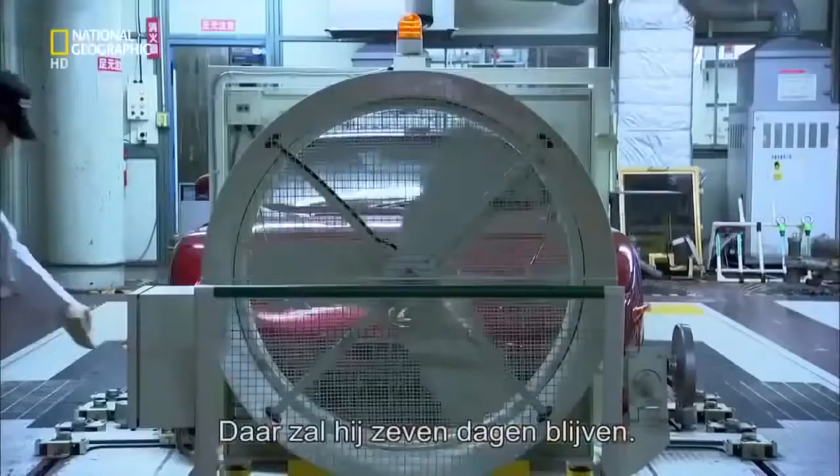With the internal and external surface inspection signed off, the car leaves the LFA works for good. It's driven through the Motomachi plant into quality control. This will be its home for the next seven days. The checks performed here range from speedometer and brake tests to water tightness. The reports fill a 350-page booklet.

Finally, test driver Amano Nobuaki ensures each of these cars is road ready when it leaves the factory. The car is bedded in on Motomachi's very own test track. The masked sections of the bodywork are to protect vulnerable areas from stone chips. I think this is the best possible job in the world. Amano checks the car's controllability, engine sound, power, braking performance, and vibration noise on the one kilometer track.

There is one danger driving this car every day. Every now and again, I just want to forget the job and drive this car away somewhere to have for myself.

This car is complete and ready for its owner. To date, all 500 LFAs are spoken for. No more will be sold. The Lexus brand is safe, but Tanahashi still has something more to prove.

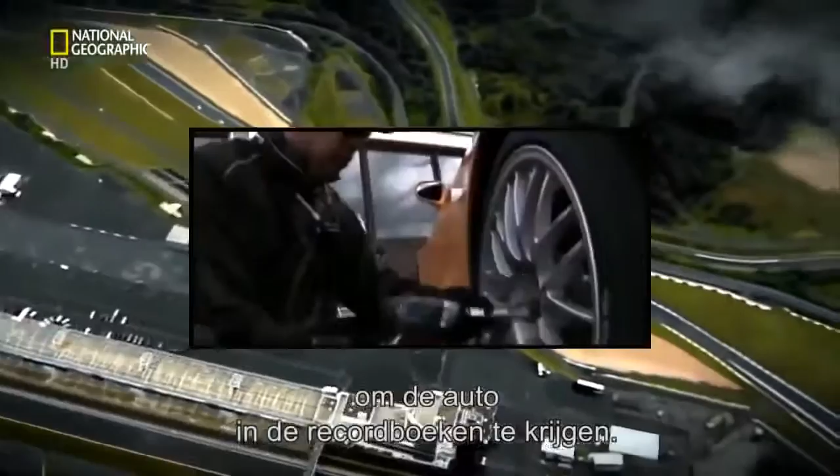In 2011, the team reassemble at the Nürburgring to put the car into the record books. They're out to beat the fastest official time by a road-registered production vehicle. This is the chance for the Nürburgring package to prove its pedigree.

With test driver Iida Akira behind the wheel, the team held their breath. I pushed the car on every corner. There are over 150 corners, driving very aggressively, but at the same time, I enjoyed it. To beat the record, Iida must average 167 kilometers per hour over the track's 20 kilometers.

I had no concept of the time when I crossed the finish line. Seven minutes, 14 seconds - the fastest official time by a production car not using slick race tires, and the 5th fastest time ever. It was an unbelievable moment. It's one of the best moments of my life.